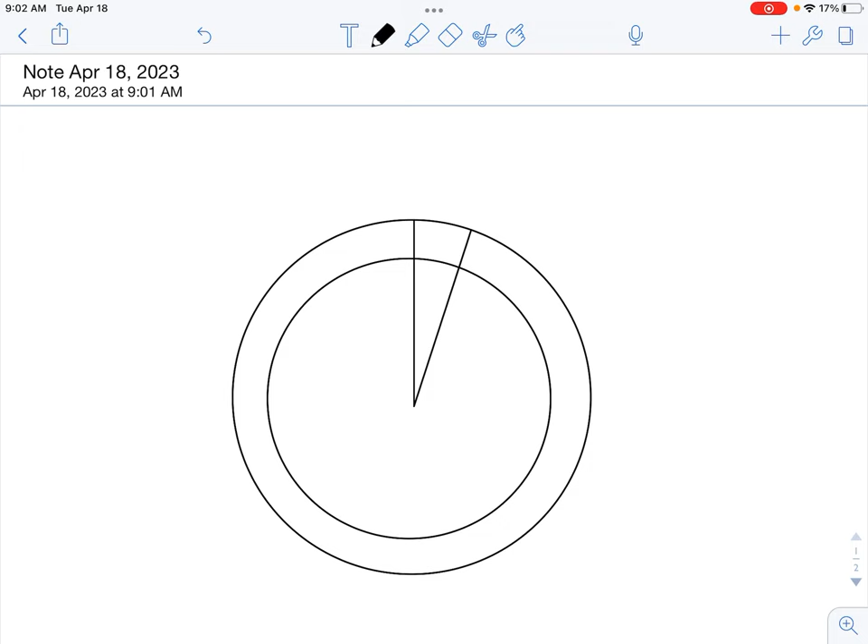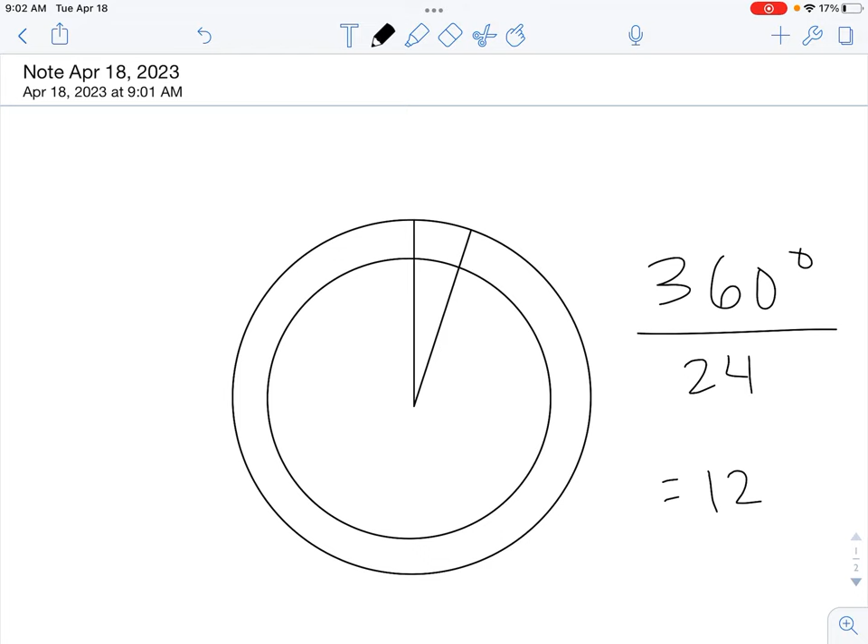What we're going to do is we're going to make one tooth. We're going to draw this angle right here. This will be 15 degrees. And the reason why is because we're doing 12 teeth, so we need 360 degrees. But instead of dividing by 12, we need to divide by 24, and I'll show you why in a second. But that's going to equal 15 degrees. So this little angle right here is 15 degrees.

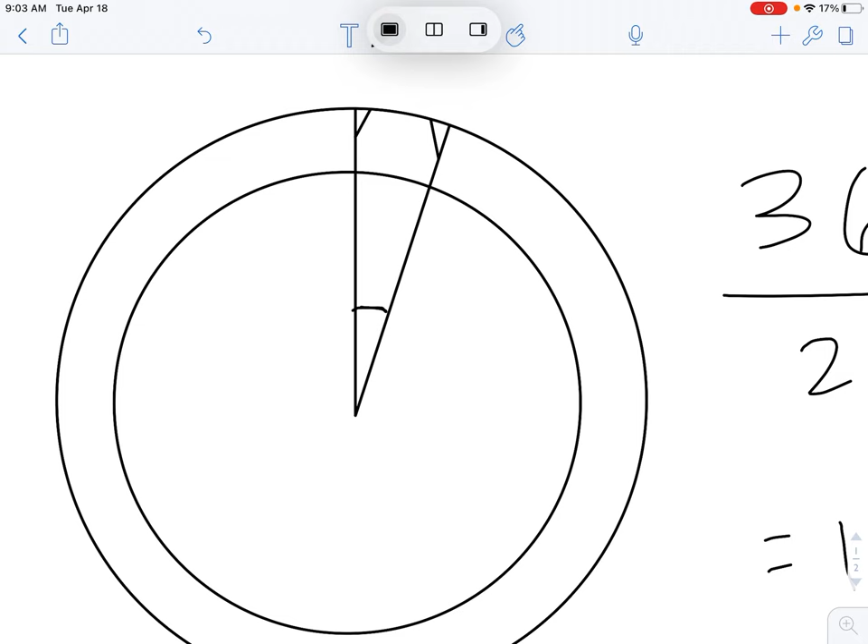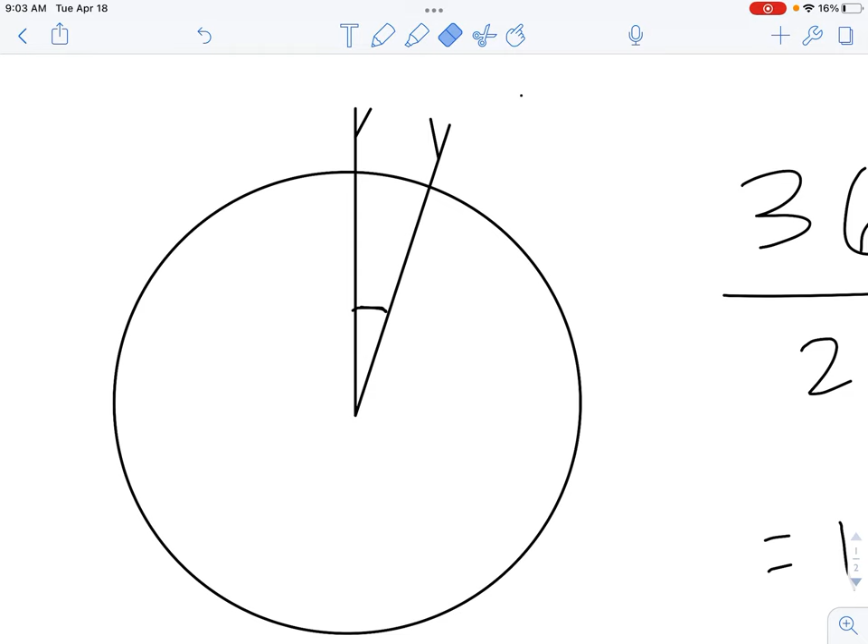And then what we'll do is we will shape this a little bit, shape this part a little bit, and then we'll use our eraser tool. We got a whole erase or partial erase? Let's do whole erase, and we'll delete that. Oops, we weren't supposed to delete the whole thing. Well, let's just do it anyway, and then we'll draw it back. This part should not have been deleted. And then we'll delete this. Okay, let's do partial erase. We're going to delete that and delete

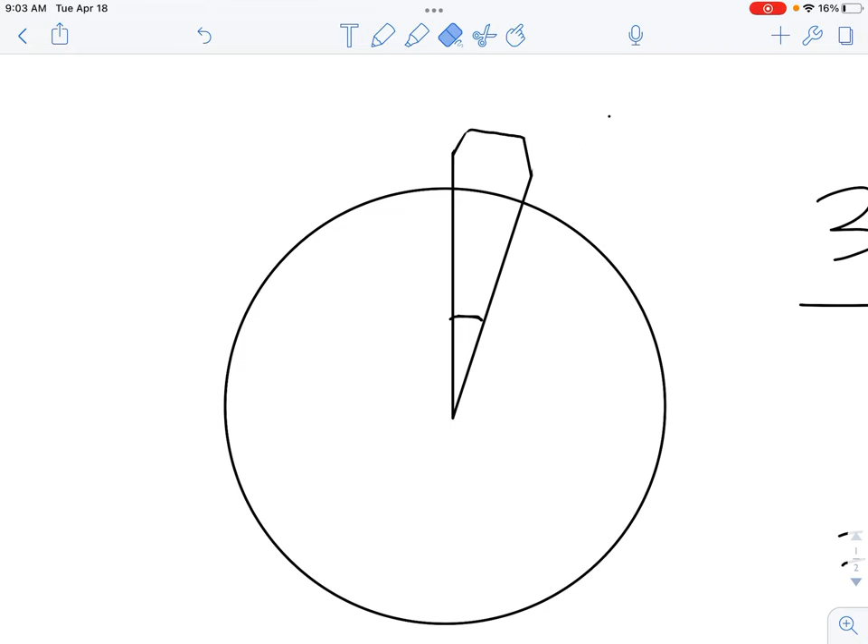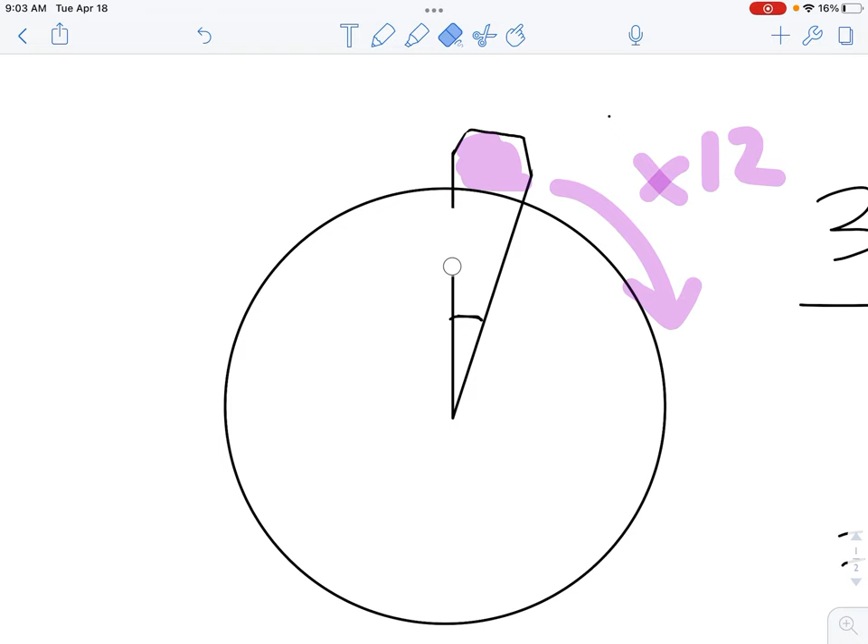this guy, and then we'll have a tooth right here that we'll use the circular pattern tool, and we'll generate 12 of those. So then we're going to come back and delete this line and this line and this line, and then we'll have a gear. All right, let's go ahead and do it. Let's jump in. So here's the gear that we're going to be creating.

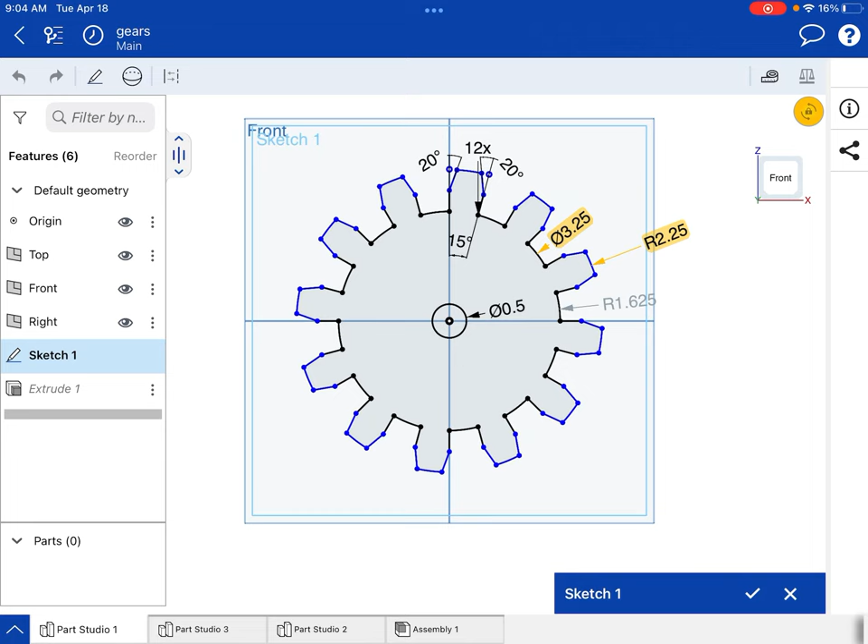Okay, and to get yours to look like mine, we're going to need to look at those dimensions. So here's the sketch that we're going to be creating. Don't be overwhelmed by all the numbers. We're going to start with two circles. The first one has a diameter of 3.25, and the second one is a radius of 2.25, which is a diameter of 4.5. So let's see if we can create that. Here we go. We'll go back and forth between these drawings. So I'm going to start a Part Studio.

I'm going to draw on the front plane a circle, center point circle. Press and hold, go to the center, let go, press and hold, let go. And we'll go ahead and turn on our dimension tool, press and hold, and we'll dimension that as 3.25 inches. And then we'll turn off the dimension tool and get our center point circle tool again.

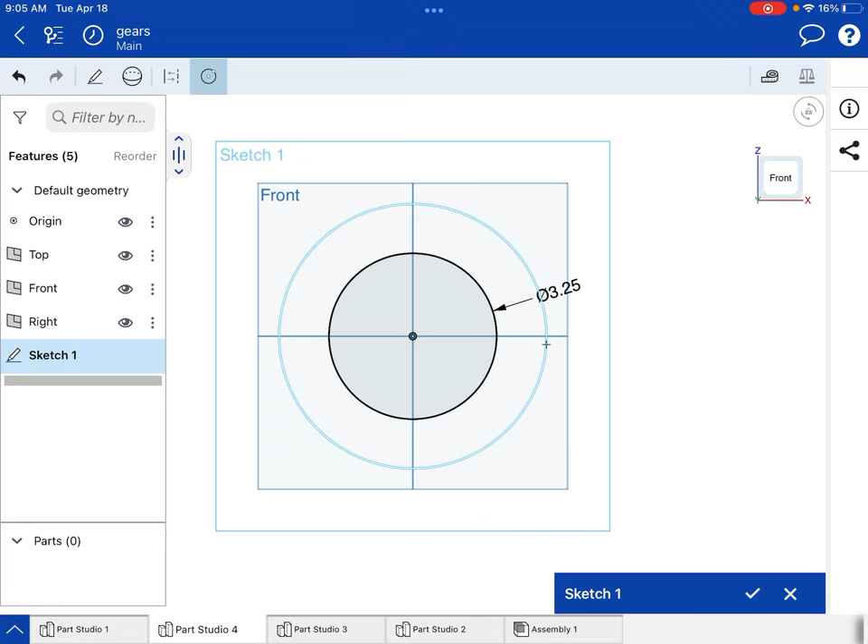Press and hold, go to the center, let go, press and hold, draw a bigger circle, and we'll go back to our tools and grab the dimension tool, press and hold, and we'll dimension this one as 4.5 inches. Okay, so far so good. And now we're going to draw a straight line. Press and hold, go to the very top, and go down, and go from the center out.

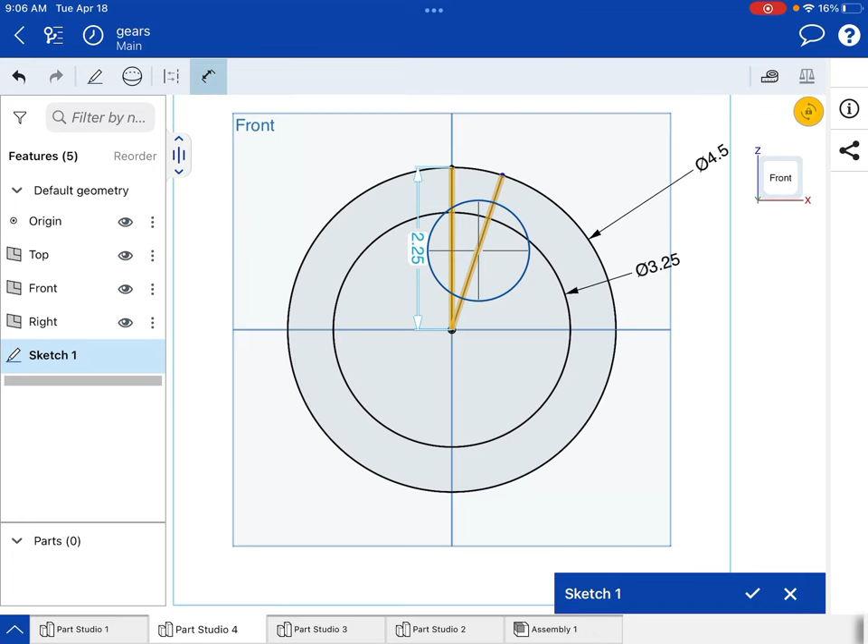Okay, and now we're going to turn on our dimension tool, and we'll press and hold and select this line, then press and hold and select this line, and then we tap on that angle right there and make it 15 degrees. So far, so good. Now we're going to use our trim tool to cut away the parts that we don't need.

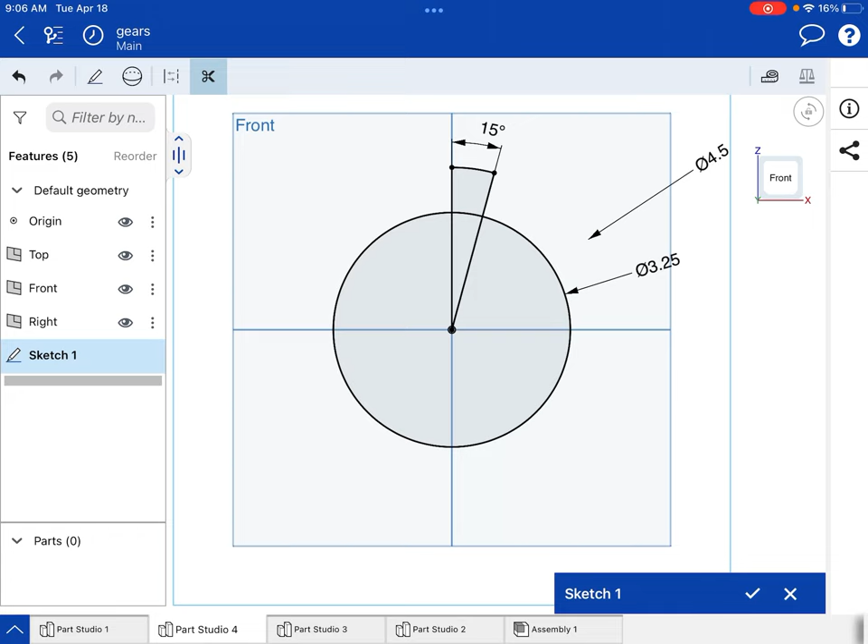And now I'm going to shape the edge of this a little bit. So let's turn on our line tool. We'll press and hold, go to the center, right? It kind of snaps to the center. And then press and hold, and then we're just going to draw a little angle. You might want to zoom in a lot so it doesn't snap to a specific spot, unless you want it to snap to a specific spot.

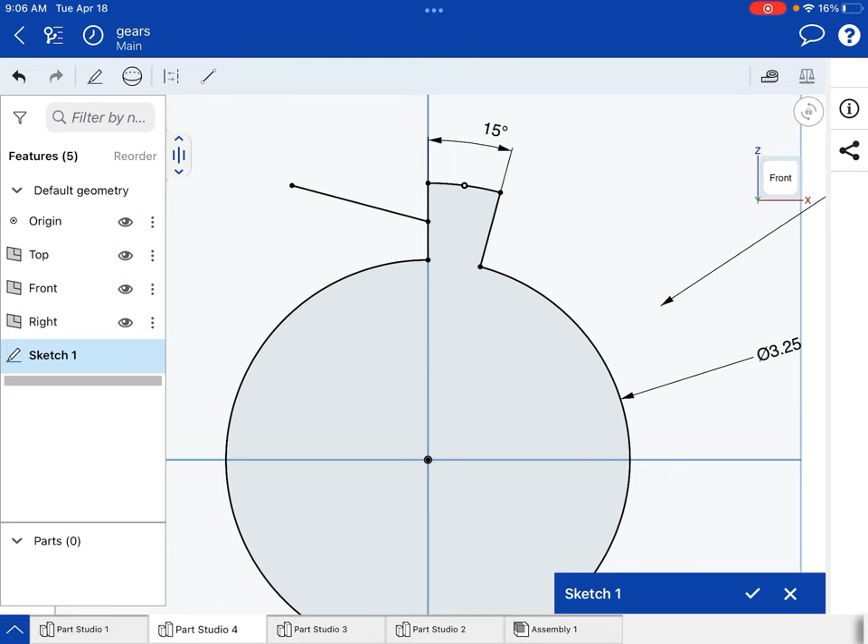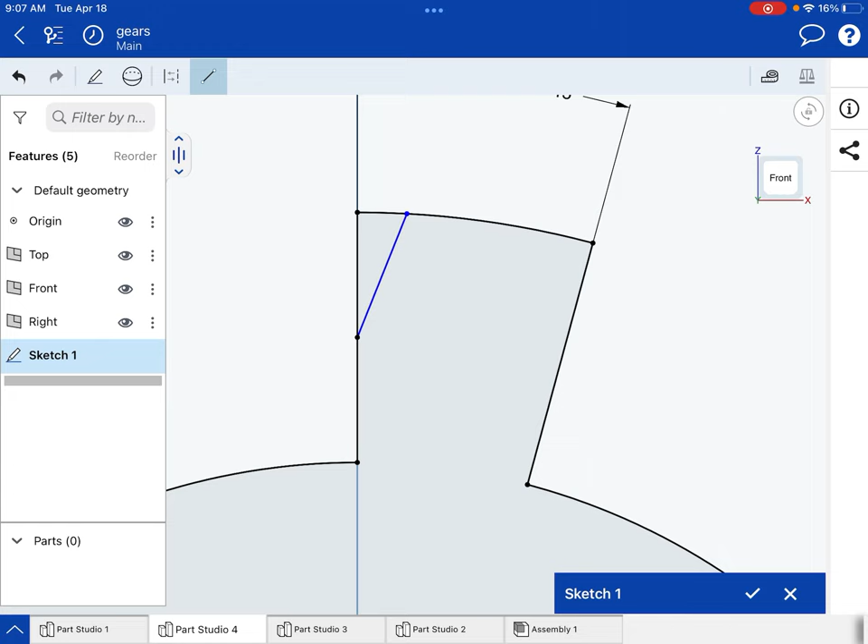I'm going to redo that. I'm going to zoom in, because sometimes you don't want to be locked in to where it snaps to. But I do want the center. So snapping here is good. Then I let go, press and hold. And here, I don't necessarily want it to snap anywhere. I don't want it to be the center there. I'm just going to draw this line, approximately, okay? And I put in 20 degrees and I thought it looked pretty good.

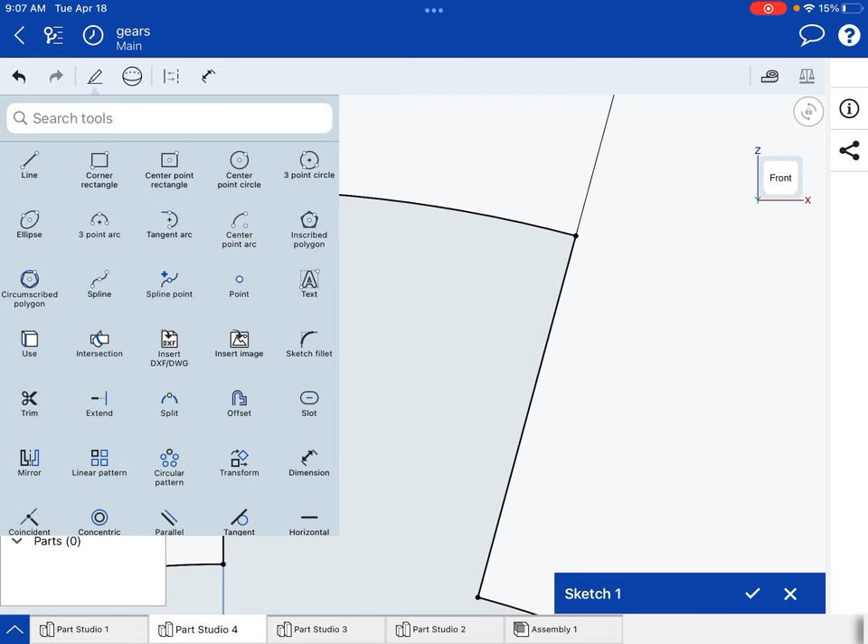So, whoops, undo. I'm going to go ahead and put in my dimension tool again, and I'll select this line and this line, and I want that angle to be 20 degrees. And to make it symmetrical, I'll do the exact same thing on the other side. Line tool, find the center, press and hold, and I don't know where it goes. I'm going to use the angle, right? Grab your dimension tool, select this line, press and hold, and select this line. We want that angle to be 20 degrees, just like the other side.

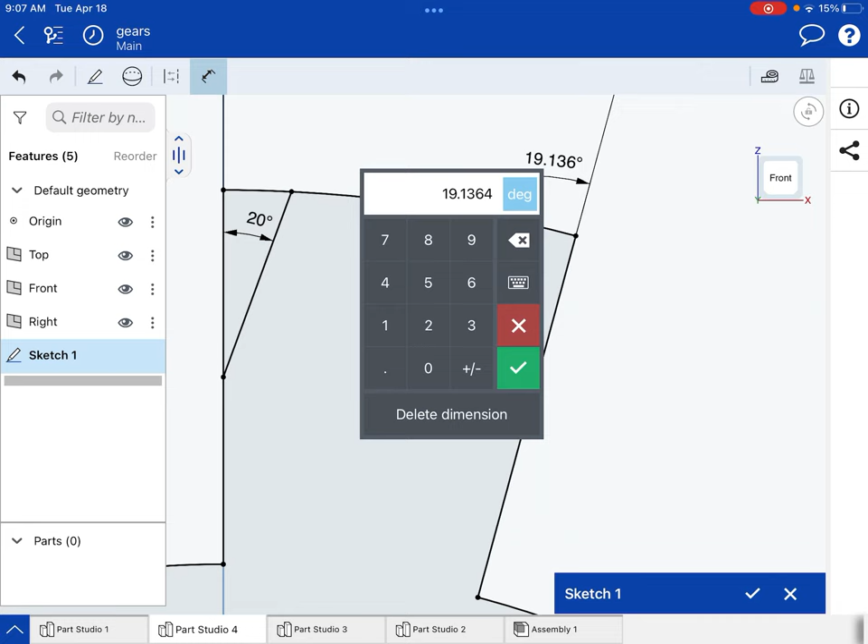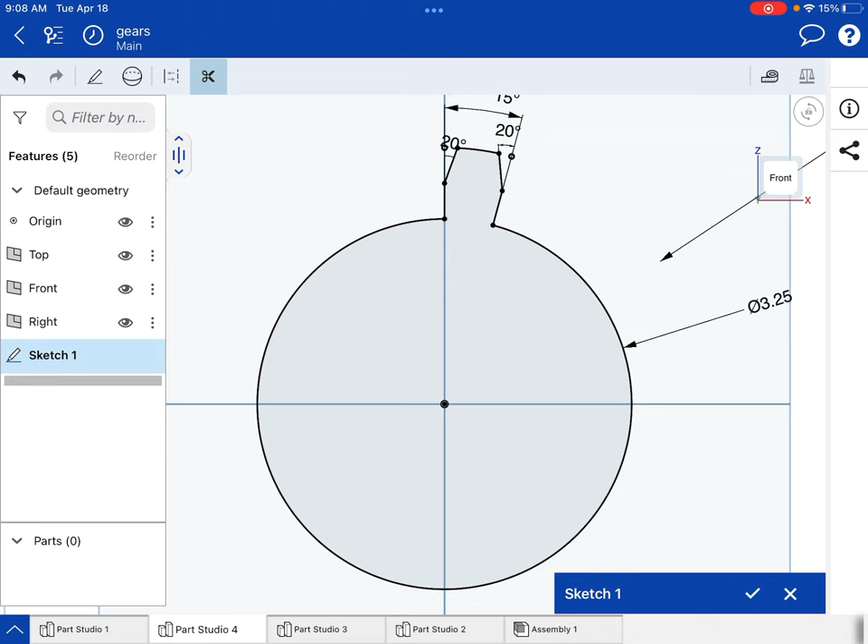Great. And now we're going to use the trim tool to remove the parts we don't want. Now we have a tooth. Great. Now we'll use the circular pattern tool to generate 12 of those teeth around the circle. So I'm going to zoom in a little bit. I'm going to select the circular pattern tool, and I'm going to tap on all the things that I want patterned. So I want the entire tooth patterned.

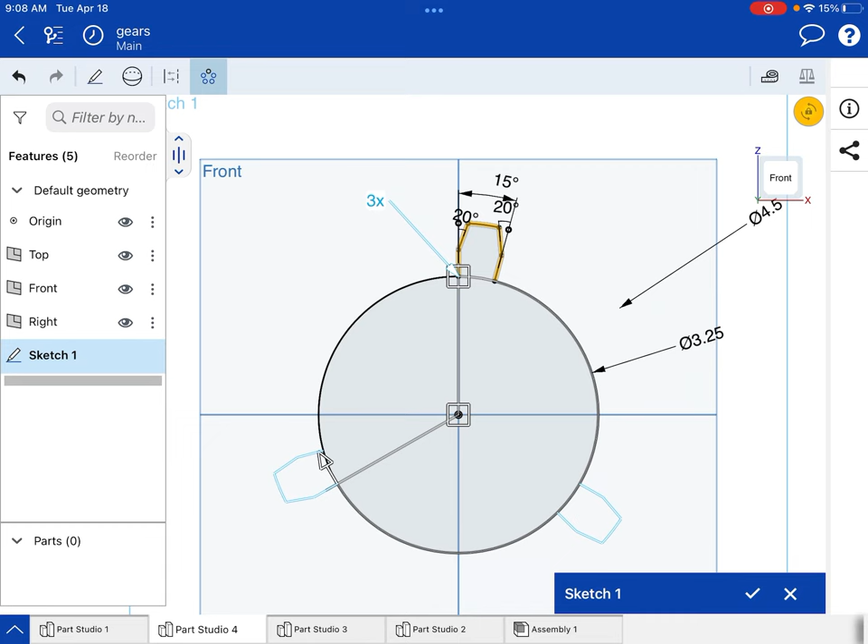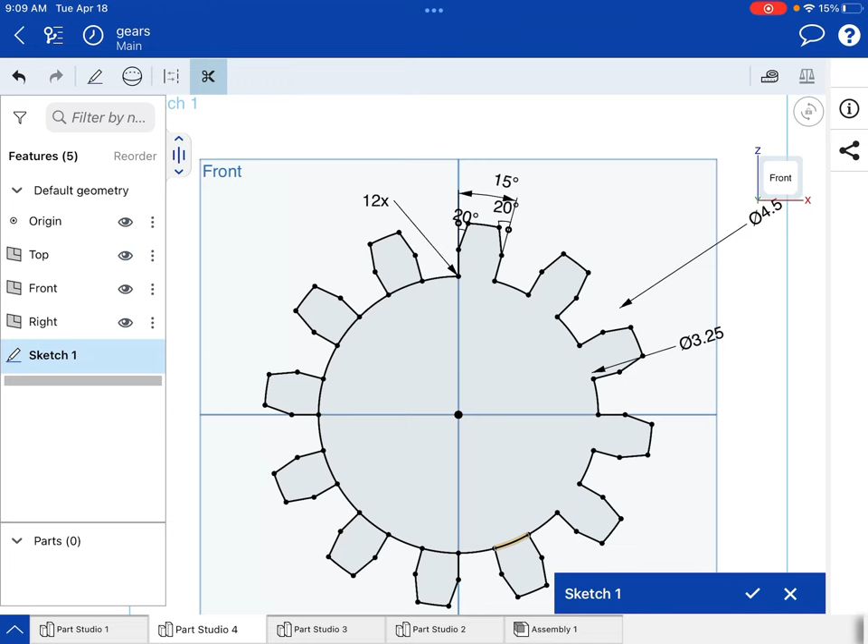If you zoom out, you'll see there should be 3. That's the default. We actually want 12. So I'm going to find this little 3x right here, tap on it, change it to 12. And then to finish the command, tap once in the white space. Great. And looks like I need to clean it up a little bit, so I'm going to use my trim tool to get rid of these little parts. You don't have to, but I'd rather have one solid piece than 13 pieces. And then I think we're good.

Hit the check mark, and then we'll extrude it, and we've got ourselves a gear. Extrude. I'm going to extrude it by 1/4 inch, 0.25. Check. And then we're good. Maybe we'll put a hole in the middle, but to keep the video short, I'll leave that. Well, let's go ahead and modify our sketch a little bit. Let's add that circle in the center.

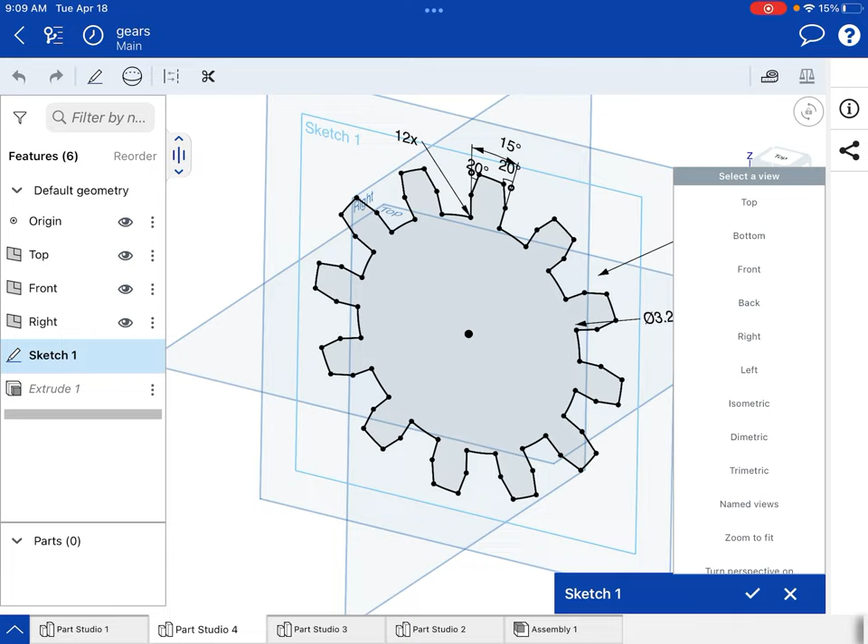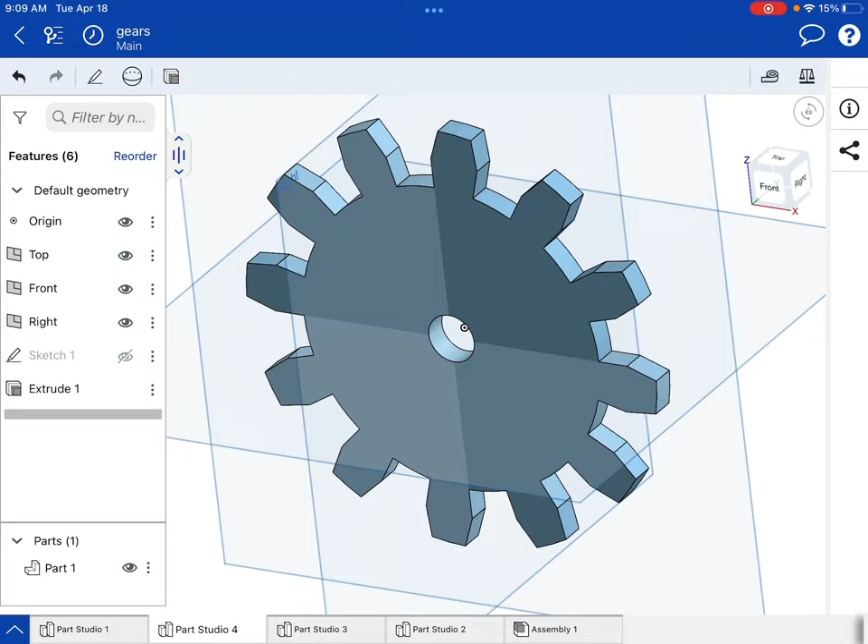Center point circle, press and hold, go to the center, press and hold, release. And let's make it 1/2 inch. .5, check, check, and then we should have a hole. There we go, and that should look a lot like what I drew the first time. And there's a basic gear. It's not perfect. Turns out the teeth need to be adjusted a little bit, but that's a good start.